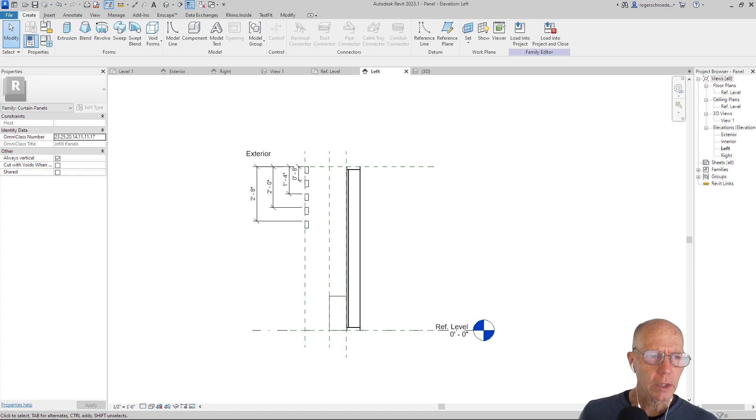So we're going to jump over to our panel. We're in the left-hand view. Our column is going to fill this whole space so it looks like a continuous element when we put one on top of the other. We're going to do that by creating an extrusion, going from the very top edge here. I want to grab the rectangle tool, come down all the way to this bottom edge, to the face of that. And I want to lock all of these off so that they behave parametrically.

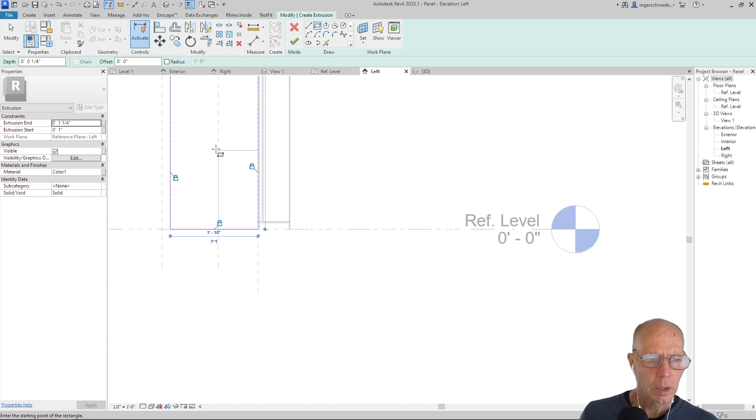It's already got assigned a color to it. I don't know if yours is, but check that so you don't have to go back and do it. Let's look at that from the exterior view now. It's that same 1/4 inch glass like we made.

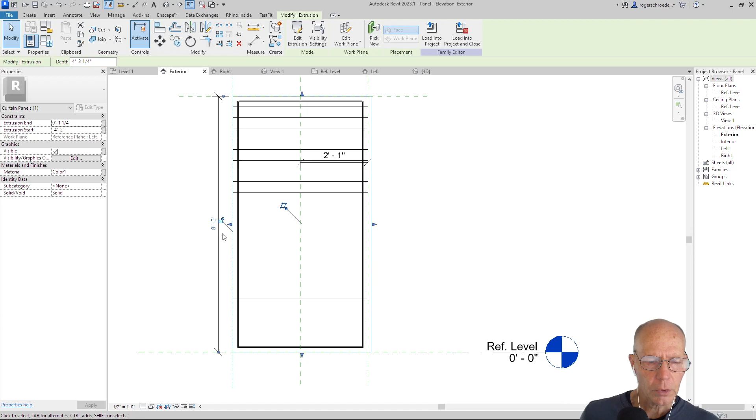I'm going to pull this over until it touches the reference line, and click the lockbox. Make sure you don't hit the dimension like I just did. I'm going to undo that and try again.

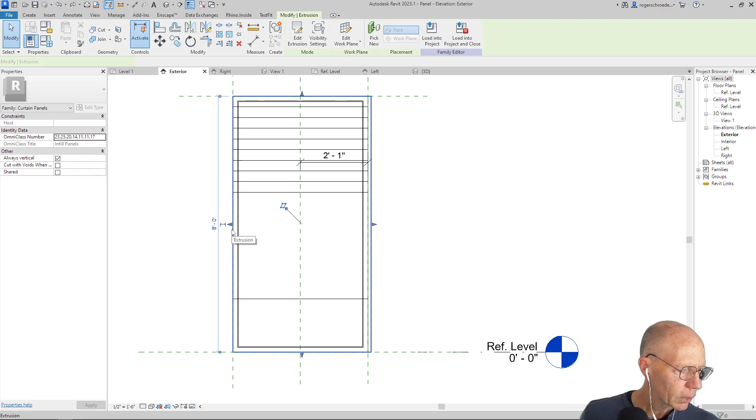So I'm going to grab that extrusion. Hold on, let me cancel out of that error. Let me grab this extrusion again, or try to - sometimes I jump over to the other screen. Let me grab that. I'm going to pull this back until it touches that line, and zoom in really close. I want to make sure I don't hit that dimension line to make it rigid - I just want to click the lockbox.

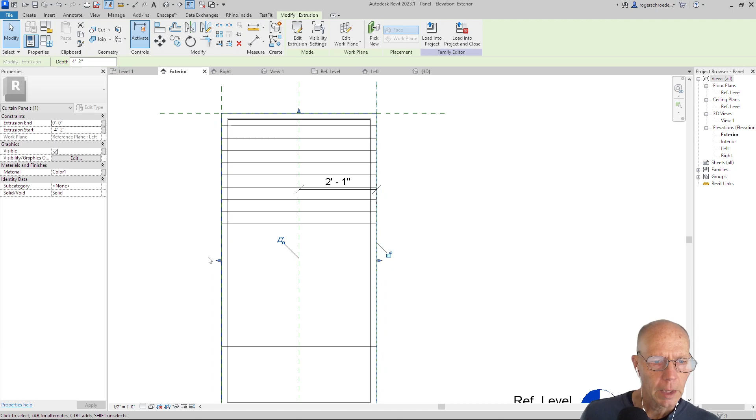We'll move over to the other side and do the same thing. Catch that reference line - oops, I've missed it. There we go, actually yeah, we're good. I'll click the lockbox. And now we can check to make sure it's going to behave parametrically.

It looks good. So let's go ahead and save it, then load it into the project, overwrite the existing version. Let's look at this in the 3D view. Now we have that solid panel, and obviously we don't want that. So what we need to do is make it visible or invisible.

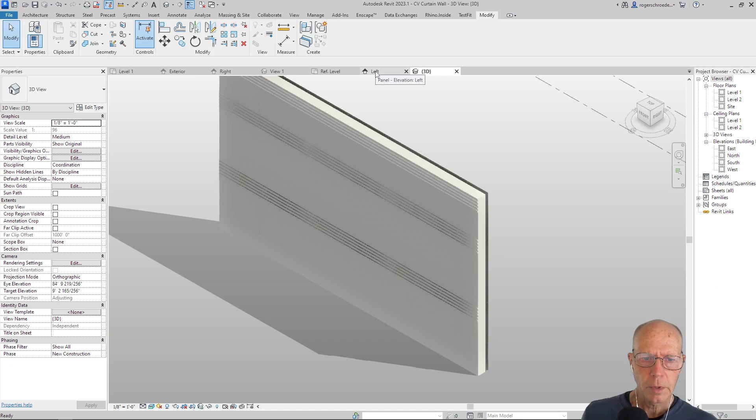So I'm going to go back to this again, and we're going to create a new visibility element for this. I can select this, and go up here and click on this - oops, not this box, wrong box, this one below it. That allows us to create these new parameters.

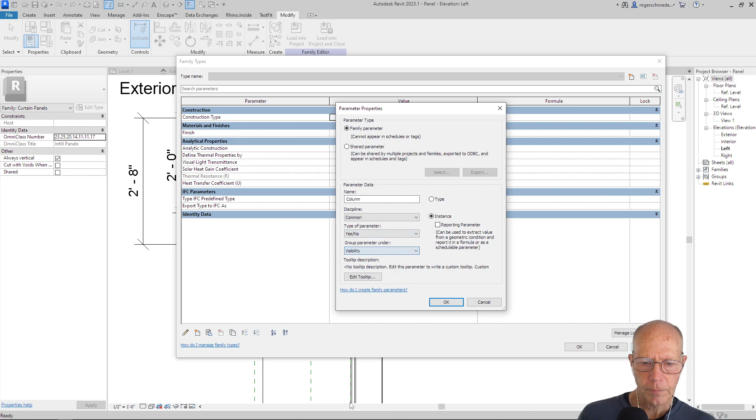I'm going to create, so it's the properties, the family types. I'm going to create a new parameter and call it column. The discipline can be common. I want it to be an instance parameter - I want to be able to change them individually. I'm going to make this a yes or no answer, and make sure it is about visibility. So make sure you set all those things up properly.

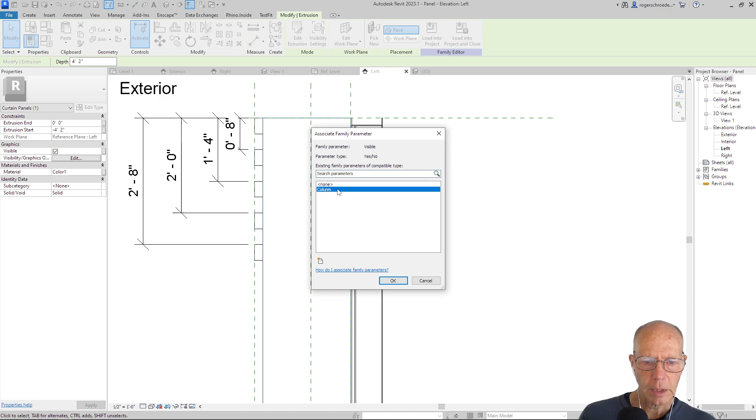We'll click OK, and you'll notice we now have this column parameter. The default has a check mark on it, which means it's visible. I'm going to uncheck that and click OK, so now I have the ability to turn that column on and off. Now I'm going to go to the column itself, click on visible, select column, and click OK.

And now I'll once again save that, and load it back into the project, overwriting our existing versions. Now since I've hidden that, when I go to the 3D view, we shouldn't see columns all over the place.

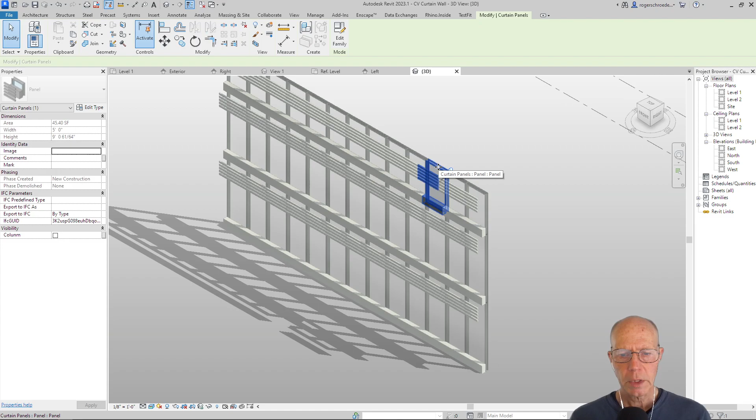So let's say we want to turn some columns on though. What I'm going to do is roll over until I select the curtain wall, hit the tab and select one of these, then right click on it carefully. I'm going to select panels along the vertical grid. I may not need to unlock these. I'm going to select visible for all of those and hit apply, and now I have a column in that place also.

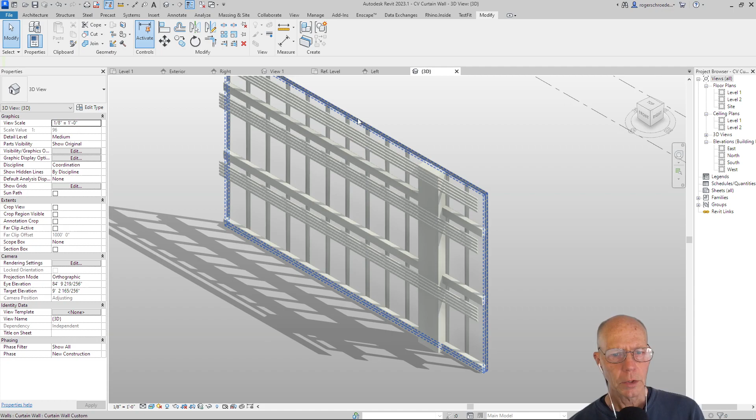I'll just do one more. So I'll come over, let's say 3 windows, 3 bays, go to the 4th bay, and tab in here. Select all, select panels along the vertical grid, and turn the column on. Now we have that idea.

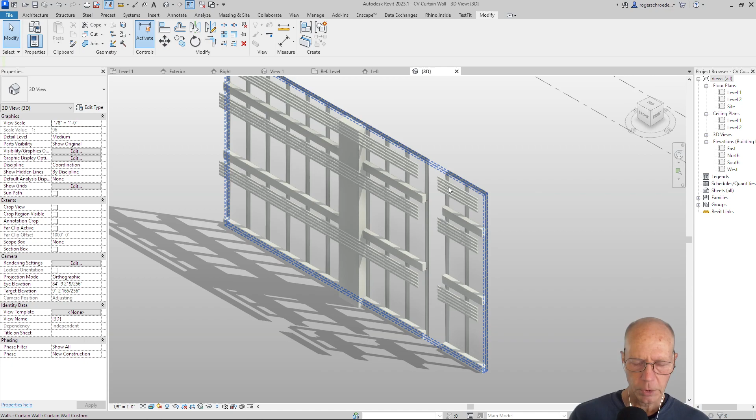And now this is actually one of the things that happens - the other grid disappears. It's really still there, it's just been lost in the view. If I were to rotate this, it doesn't appear. But let's close this view off and then try to open it up again - there it is back again. So it's kind of an error in the way the system or graphics card works. It kind of loses the one panel system.

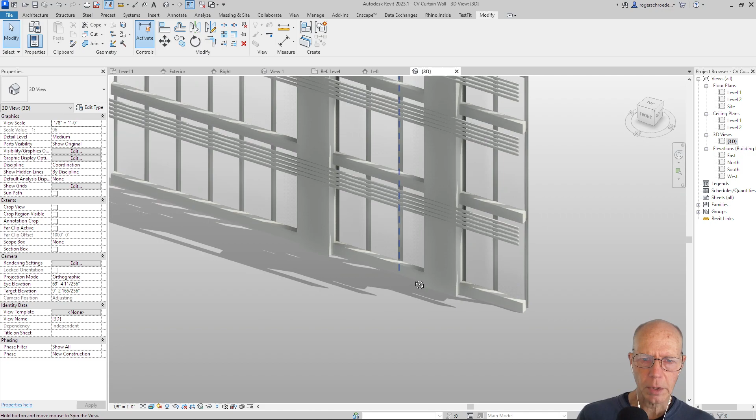So there we have the column system that we can add. It's got a hierarchy to it - you'll notice that this shallow spandrel is below it, kind of like we did with the brickwork. Our baguettes are still running across the face, creating another level of texture and visual interest. And those could be ordered in any way you wanted, but that's just the start of the power of this kind of tool.

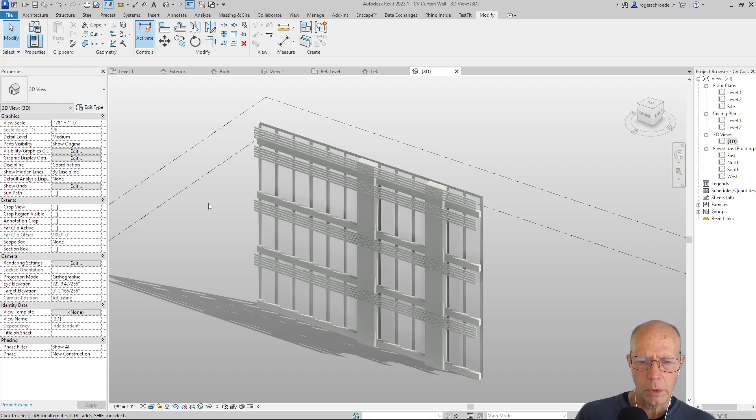So I'm going to grab the top of the wall and pull it up. You'll notice that that column continues up, so no matter what we do with the height of the wall, we're automatically able to adjust for that also. So we'll look at putting this together into some kind of a presentation sheet next.